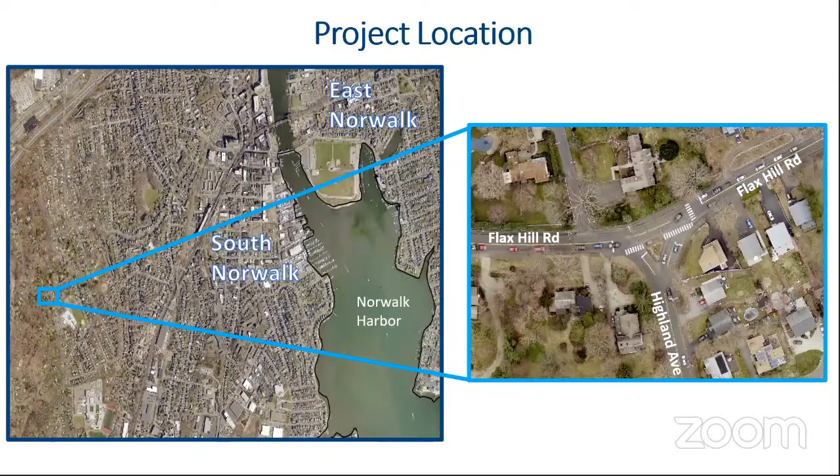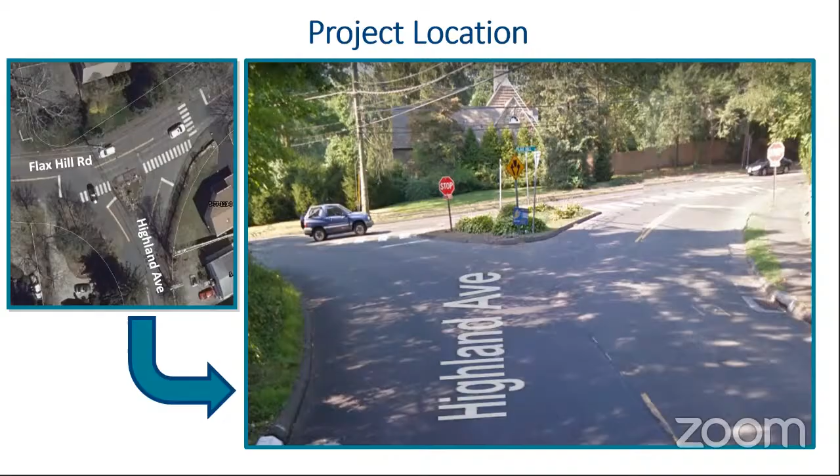The purpose and need of this project is to improve safety and pedestrian mobility at the intersection of Highland Avenue and Flax Hill Road. We want to reduce the number of potential conflict points and crash rates to improve pedestrian and motorist safety there. There have been 17 crashes recorded between 2016 and 2020, 2 of which resulted in injuries, and there was also a fatal crash at this intersection in 2014.

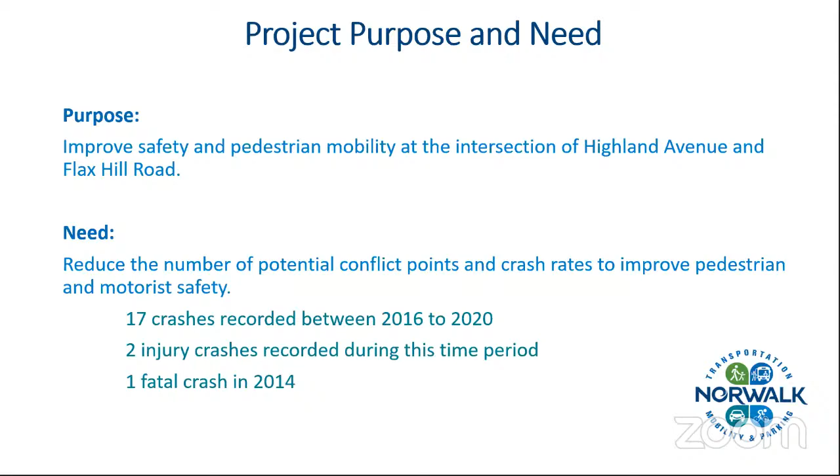Right now there are 7 conflict points for rear-end collisions. We would like to reduce that to 3. There are also 4 angle collision points, 2 of which are identified in red there, where it's very confusing and a lot of people get confused about who has the right of way. If you stand there and observe it, you'll hear some horn blowing and other unmentionable signals. So what we'd like to do is reduce this conflict also from 4 to 2.

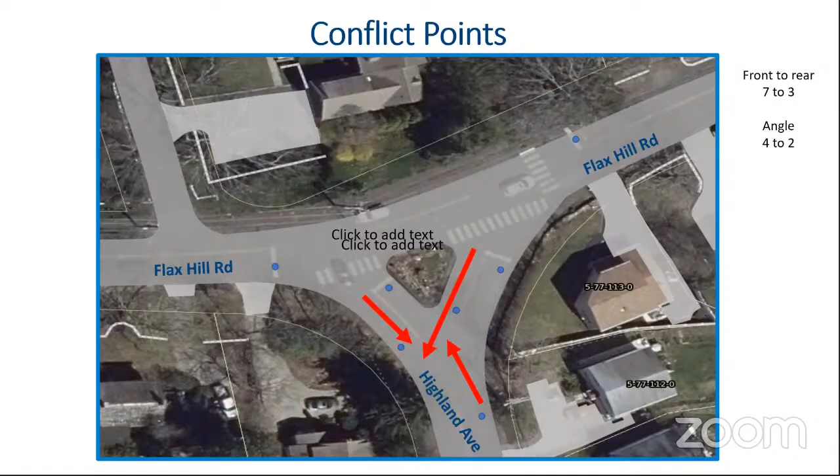There were some previous studies regarding this project. We had the Roton Middle School Safe Routes to School project in 2009, done by the Southwestern Regional Planning Agency. There were comments from the public at that time that the traffic control at the intersection is very confusing, and drivers are required to assess traffic control twice in a very short distance. Again in 2012, we had a Norwalk citywide transportation management plan where the Flax Hill Neighborhood Association was interviewed. They said there are difficult turning movements there, that the triangle is not working out, and suggested re-examining it and maybe looking at a proposed T intersection or a roundabout.

These comments resulted in 3 projects. We had the Safe Routes to School project, phase 1, which we completed about 2 years ago, running from Witch Lane to Knollwood Road.

We're working on another project currently, which is phase 2, Charcoal Road to Meredith Court. I have Greg Pacelli here who can offer some insight on that project.

As Mike alluded to, we're going to take this as another extension of a Safe Routes to School project and continue heading north on Highland Avenue, connecting with the intersection of Flax Hill at Highland. Just north of Meredith Court, we would connect to the intersection improvements at Flax Hill at Highland, and work the sidewalks all the way south to Charcoal Road, meeting up with the previous Safe Routes project.

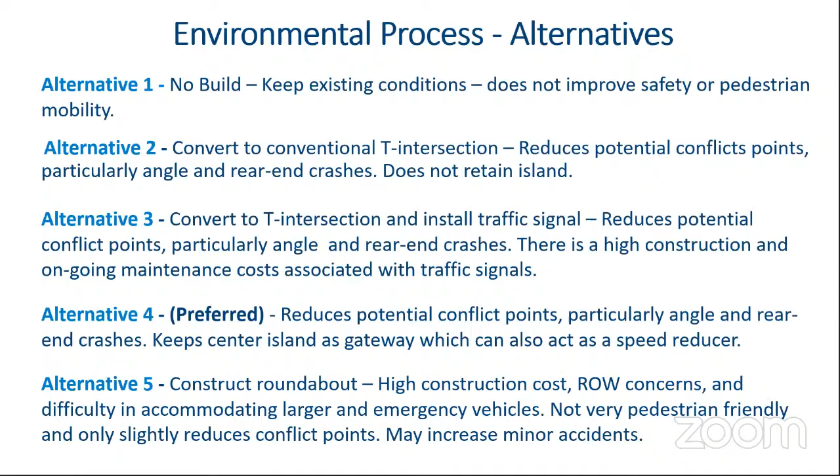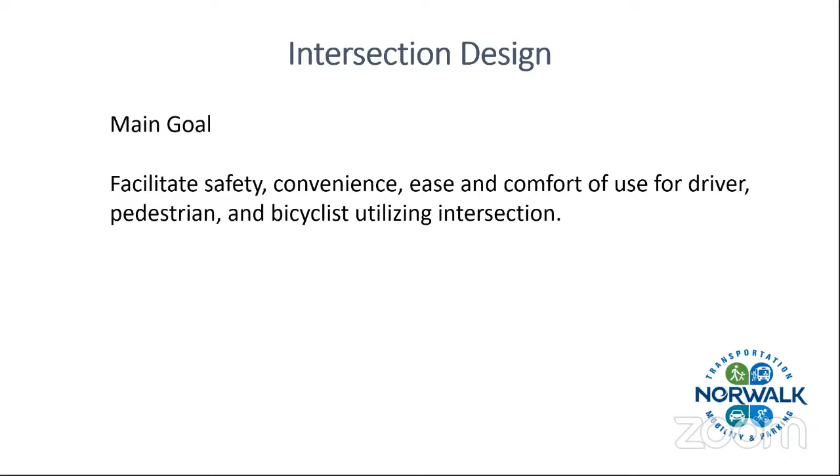So the main goal of an intersection is to facilitate safety, convenience, ease, and comfort of use for the driver, the pedestrian, and the bicyclist utilizing the intersection. So to achieve these goals, we look at several factors.

Human factors, which is the driver's ability to make decisions, driver's expectancy, decision and reaction time, driver, pedestrian, bicyclist use and habits; the traffic movement considerations, the design and capacity, variety of movements, crash experience, conflict areas, angles of intersection, sight distances, and crosswalks. So putting all these together, this is the way we kind of arrived at the decision to maintain the island and tee up this intersection.

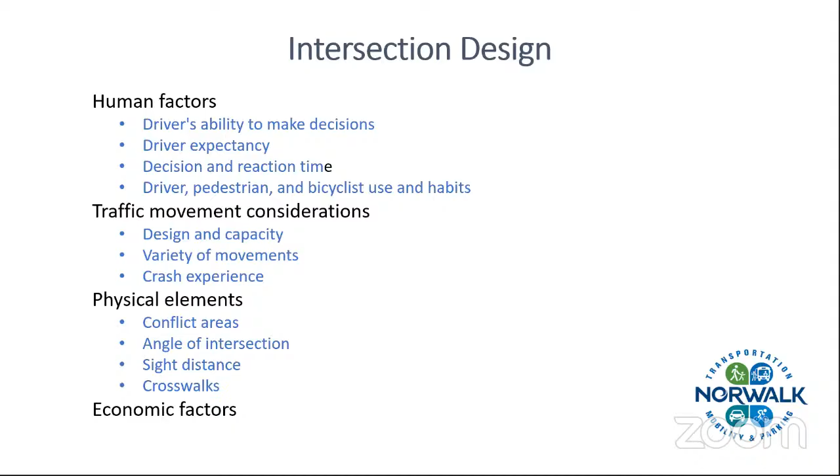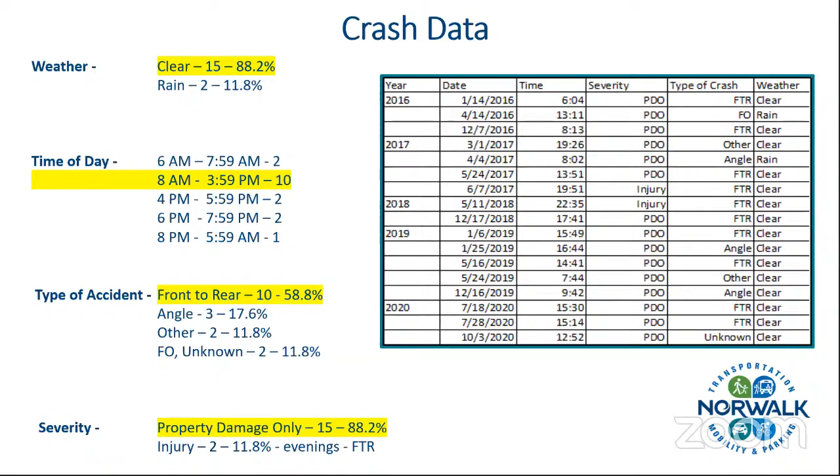We're adding another crosswalk on the south side of Flax Hill. We're tightening up the intersection so vehicles are able to get through there, and we're going to improve some of the sidewalks, make it easier for pedestrians, and make them ADA accessible.

Impacts of the project: Flax Hill Avenue will remain open during construction. The proposed improvements are determined to have no foreseeable capacity to affect historic properties under Section 106 of the National Historic Preservation Act. Highland Avenue may be closed at times during construction, but we will try to keep it open as much as possible.

There are some times where we may have to close a lane in a direction to build the island or get some of the curbing in. There will be temporary police or flagger traffic control in place. Access for local residents and emergency service vehicles will be maintained throughout construction, and we will work to coordinate this project with the school schedule so we don't interfere with major school events, as there are 3 schools on Highland Avenue within close proximity, and buses, parents, and everybody use this route to get there.

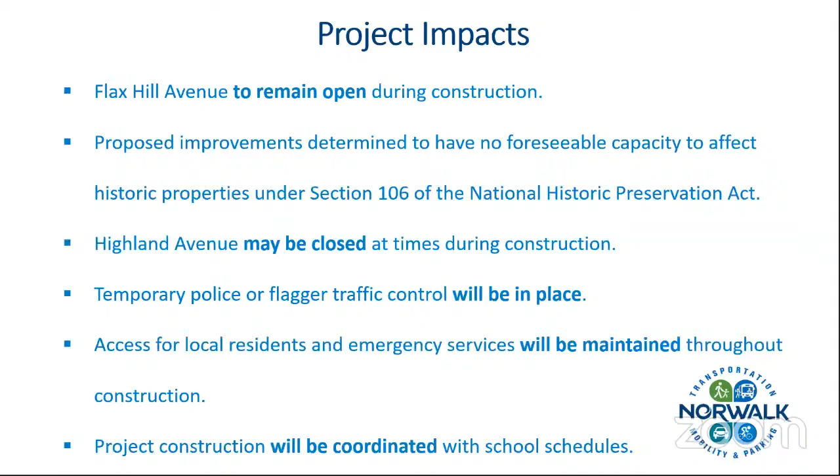So we want to minimize inconveniences. The project is funded under the federal local road accident reduction program, and is administered by the Connecticut Department of Transportation. The estimated total project cost is about $375,000, which is funded with 90% federal money and 10% city funds.

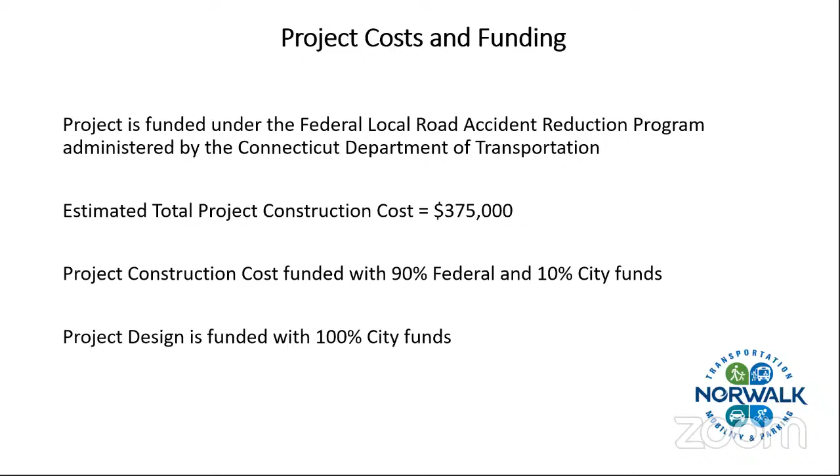And the project design is being funded internally, 100% with city funds, mostly through city staff. So here's a quick rundown of the project schedule.

The public comment period will run from tomorrow, December 1st, through December 15th. We need the comments back at the end of the day, December 15th, either by email or by mail. We'll review those public comments and incorporate them as warranted.

Then we'll look to obtain council resolution sometime in January. Based on successful council approval, we'll begin final project plan work. We'd like to have those completed around late spring of 2022, then send those to ConnDOT for their review. Hopefully get project advertising in the fall or winter of 2022, and would like to construct this in spring to summer of 2023.